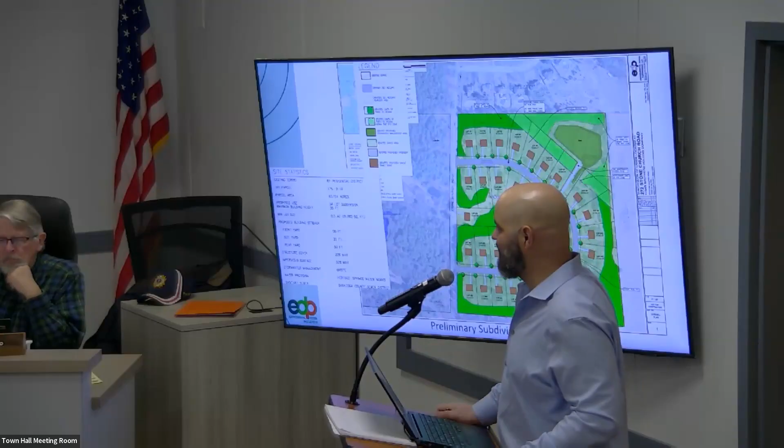That's moving along very well. We've been working with the county. Stephanie Ferradino is the applicant attorney who has been working with the county as well to get this finalized. I think we're just down to the easement figure now, being able to finalize it before the county board of supervisors can vote on and accept that dedication.

We will touch on this slightly. We are providing a screening and buffer along Stone Church Road, where we're going to leave as much vegetation as possible and then supplement that with a 30-foot wide buffer. This is the exact language and buffers that were provided on Greenfield Avenue associated with the Hunter Lane subdivision that is currently going in.

Another area we need to continue to work with the town on - I thought we had it figured out in the last subdivision, but it appears to be changing - is the mail kiosk, and how we're going to treat it. The mail kiosk itself has been pulled out of the right of way and is located on a private lot with an easement that will be owned and maintained by a homeowners association. That will be the only need for a homeowners association in this project. All of the improvements within the right of way are somewhat up in the air with the town DPW. Maintenance and operation certainly would not be their responsibility, it'd be the responsibility of the owner or the HOA. We would be fine eliminating the pull-off.

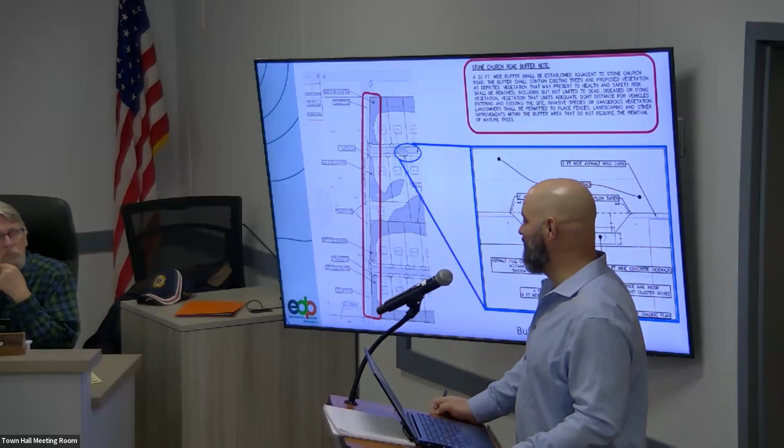I don't know that there's a need for it, but we do need to extend a sidewalk out to the road. We're open to whatever the town's going to approve. I just don't know what the DPW and the powers that be are going to come up with to make that happen. We will build this - we will build a sidewalk out to the road from the mail kiosk, keeping it on private property. That's, I think, one of the items we're going to have to condition any approval on: development of the mail kiosk to the satisfaction of the town.

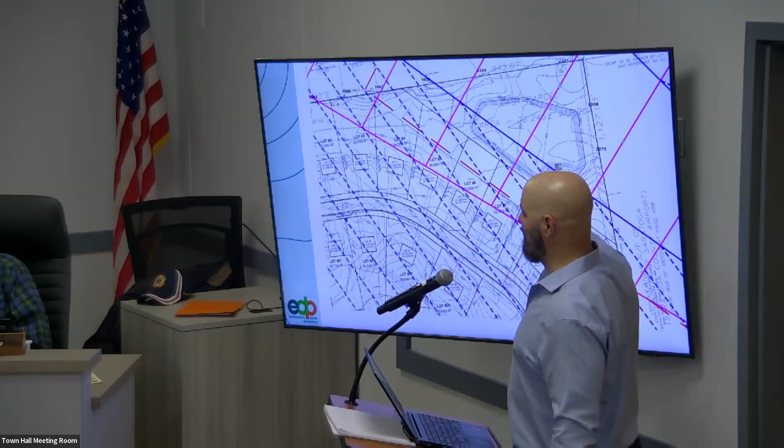All these lines represent all the different surfaces we've been working on. The red is the limit of the RPZ zone. The purple is the approach surface zone, a three-dimensional surface elevated above the house. Similarly, the blue is a vertical trapezoidal surface elevated above the house. In no instance does a house that meets the town's height requirements extend into any of the vertical surfaces or into the horizontal surface, which is the RPZ zone.

We also talked about the other item we were working on with the county: the proposed four-way stop to be located at Geyser Road and Stone Church Road. Today we received approval, or consent, from Chad Cook at DPW, identifying that the plan I'm showing here is what they will accept when it goes to construction.

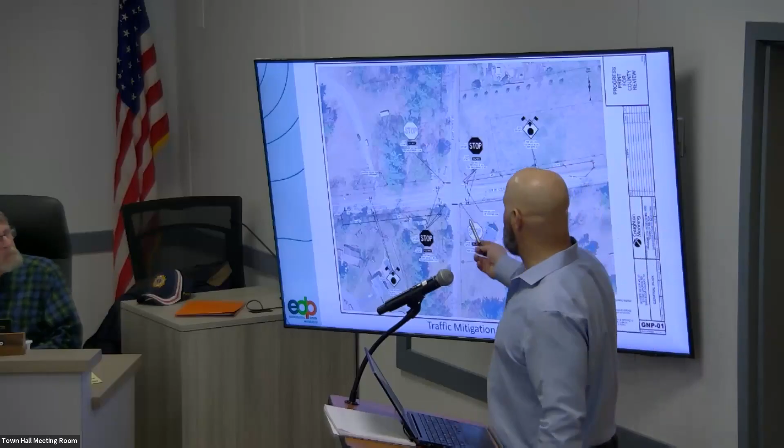To give everyone an idea of what they'll see at the intersection, there will be a four-way stop with a stop sign on both sides, so eight stop signs total at this intersection, using reflective diamond grade tape. For a period of about six months, there will be approach signs identifying 'stop ahead,' with orange flags on top, and all the stop signs will also have flags on top.

In addition, we're going to have a variable message sign on either side, going in about two to four weeks before installation of the stop signs and two to four weeks after installation of the four-way stop signs. Then they will be removed. But this is ultimately what has been approved by the county for construction there.

May I ask a question? I saw a document a month or two ago that said we didn't need one at the four-way stop. Am I just wrong, or did they change their mind?

There was a traffic engineer for our project who identified that we needed one. County DPW, through an independent study not solicited by the applicant—I believe it may have been solicited by the town, or the county did it a couple of years prior to this application, I can't remember if the town asked for it—found at that time it didn't warrant a four-way stop, but that was based on existing conditions. It didn't include this project, and it didn't account for what has occurred down at Milton Center.

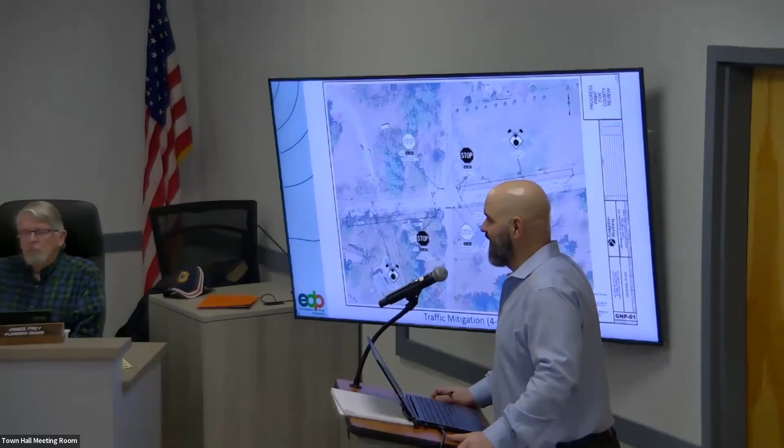Thank you. Ms. Maruso, do you want to highlight your report?

Sure. So just to reiterate and validate what Joe had said, the bigger outstanding issues with this project review largely pertain to county issues and the mail kiosk issue. As you've just gotten a comprehensive review, those are all being addressed or have been addressed. As Joe indicated, we've been privy to the discussions the applicant's been having with the county regarding working through the abrogation easements and associated mapping.

We've also been part of correspondence and received confirmation from Chad Cook this morning as to the consent to the latest updated plan for the offsite traffic mitigation. Again, as Joe said, we were kind of caught in this process, trying to figure out the best sequence based on the agencies that needed to render approval. So he's here tonight with a complete application that's received a positive comment letter from the county, fulfilling the conditions attached with the county referral.

We've also now received an update with regard to the formation of an HOA, which addresses, at least temporarily or in the interim until there's a larger policy in place, the mail kiosk maintenance issue that we've been dealing with. It's a planning challenge we see far beyond this particular project and would like to work on, but that's neither here nor there.

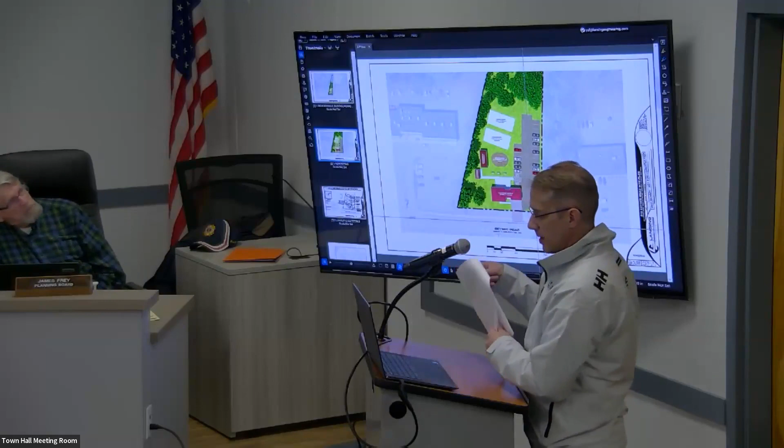The other reason, and this relates to another comment about screening, there was a request to provide plantings along the frontage, and the applicant's willing to do that. The thought was, if we leave the configuration where it is, it affords us the opportunity to wrap those plantings around a little more, as opposed to having a straight shot in where you can't plant on the pavement and people would be able to view in. This gives more opportunity to put plantings around that side and help screen that parking area. So that's that particular comment.

There was also a comment about the proposed hours versus other establishments in town. There was reference to the Milton Tavern being open from 11 a.m. to 11 p.m., and Dozers, just right across the street, being 11 a.m. to 12 a.m. So similar hours to what is being proposed. We feel it's appropriate for the area, especially considering, in our opinion, Geyser Road is mostly converted to commercial. We think it's a commercial corridor. This fits in with the fabric of the corridor, and as far as existing residents, the establishment in relation to all the other businesses in the area is quite close to Geyser Road, so we feel there's more than adequate buffer to any surrounding residential structures.

There was a comment about the lights. Our schedule says 7, the plan says 6. We apologize for that, that was a typo on our part. There are 6 lights that are proposed.

And as far as the height, the little tiny small print on the plan does say 10 feet. We'll make sure that's clarified on future submissions where we specify the 10 feet.

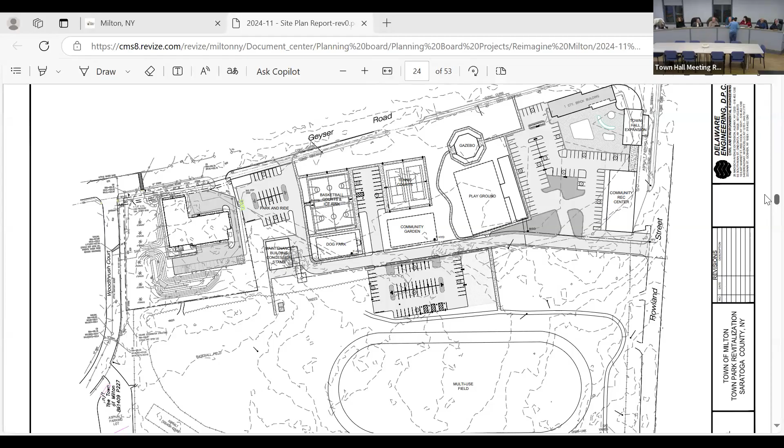We got a lot of comments from the public to have the playground be fenced so that parents can be sitting under the pavilion and enjoying themselves and watching the kids. So that was set up, that was a big comment, particularly from moms.

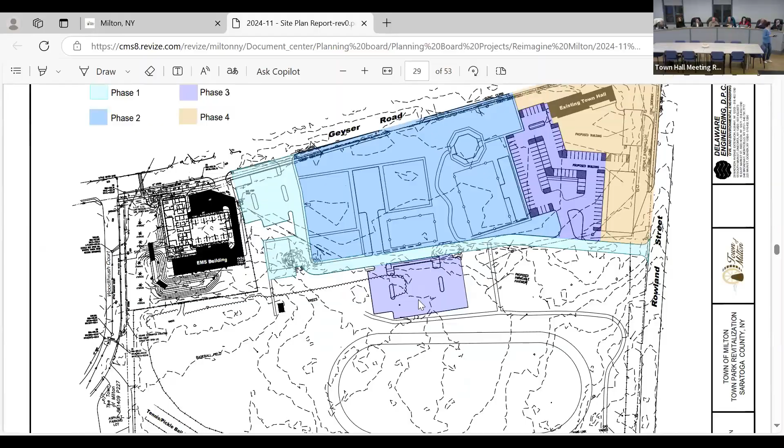Okay, there's some public service things like a compost pile, sand, salt bin and brush disposal that exist there now. Are those all going to be relocated? They're going up to the highway garage. Is that noted in here somewhere? It's not noted in the 80-page Reimagine Milton report, but if you look at the new plans, when we referred to the highway garage, the public sand and salt bin is there. The mulch pile and that other stuff, yeah, those were all accommodated up at the new highway garage.

Thank you, yeah, steel structure. Yes, so there's bunkers set up at the new highway garage for much easier access for the public to those. This one's not lost in the shuffle, no, everything that's here is being relocated up there. So this will be a completely open site. The only thing that's really going to stay is we have park maintenance down here now. We're going to continue to have park maintenance, it's just going to be a new building.

Just a thought, going off his concern about through traffic. I don't know if there's like temporary humps, they're rubberized, I think they're made of rubber. I'd like to refer to them as tables, speed tables. There's speed bumpers, tables, but they can be taken out for winter plowing. Speed tables you wouldn't even have to take out, you could leave them. Right, they're wider, longer. That might be a solution.

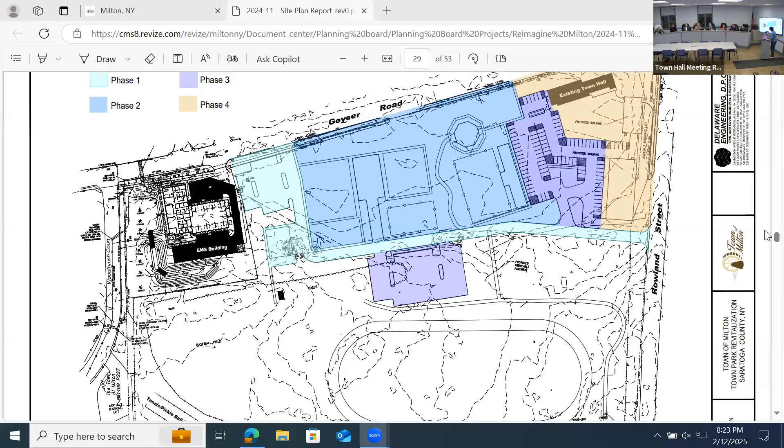This is permeable pavement. This is where the food trucks would park. Nope, that's parking - the purple is parking. And you see this label, it says proposed permeable pavement, correct? So this would be where the food trucks would park. I thought that, and the farmer's market and stuff, I wasn't sure where all that would be accommodated in here.

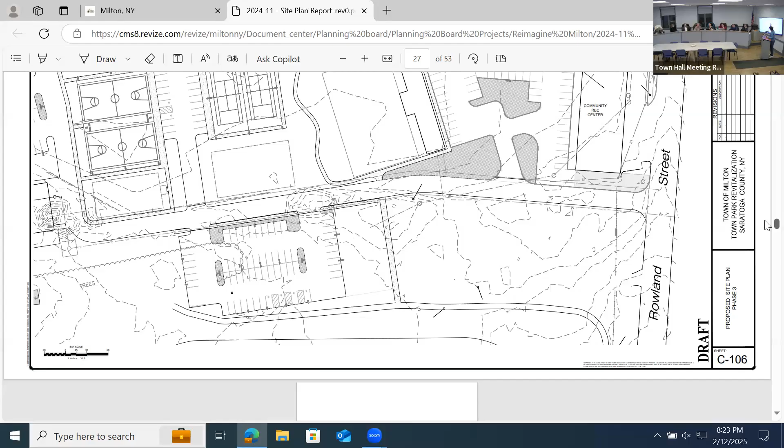So yeah, this area is the area for the food trucks. It's permeable pavement, so you'd have driveway access, and then this is kind of a great lawn where you would set up tents and do things. And then what was it - oh, the farmer's market. So there's a couple of different things you could do here. The pavilion is a good location for that as well, because it's simply got tables underneath it. It's this building, not that big though - the pavilion, right? And it's got power, it's got water, it's got sewer, all here.

It's basically just open, right? It's open on all sides. It's got picnic tables underneath it, it's a concrete pad. And this center part's where the facilities are. So this would be a good spot for a farmer's market. This band shell could be a good spot for it, or eventually way down the road, the community rec center for indoor use in winter time.

If you're thinking of that pavilion, I've seen this at some of these regional markets - those pavilions are high and allow box trucks to pull in underneath them. That's not what you're proposing here. Most, even the farmers markets here, have a vehicle and more than just a table.

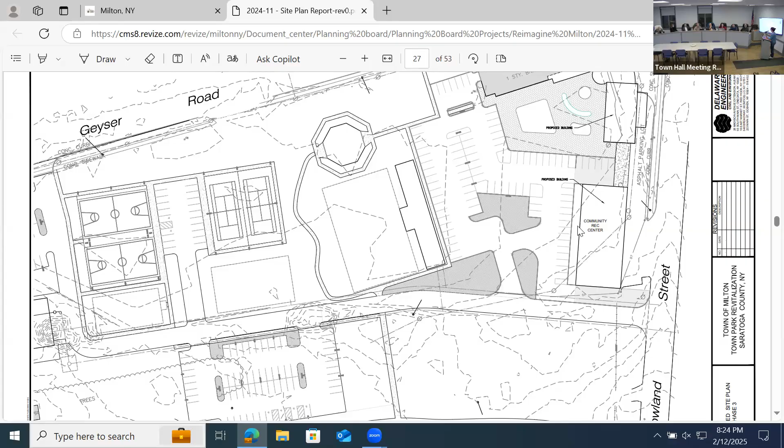I'm just trying to think - well, we can always set it up down in the parking lot. There's a lot of farmers markets where people just bring pop-ups, and they're not bringing a big vehicle setup. So I think it depends on the scale of your farmer's market.

If you're looking at something huge, then that wasn't something - I just don't know what the experience this summer was with the one we had, how successful or unsuccessful it was, and what type of facilities were used. I just didn't see it written in there. Yeah, that was the site's intended to be very flexible.

All right, if that's it, I'll just do those 2 or 3 comments and then push the recommendation to the board. I'll share it with you before I send it out.

When's the town board meeting? The 26th or something. Okay, so with that, I just need a motion to allow me to finalize a memo forwarding the recommendations to the town board. I'll make the motion. I'll second. All right, any further questions?

Being none, please poll the board. Mr. Marsicano, yes. Ms. Van Danza, yes. Mr. Whittle, yes. Mr. Fry, yes. Ms. Marin, yes. And Chairman Barto, yes. Okay.

Our last matter of business this evening is a review of the as-built drawings for the Fair Oaks Road dedication, which includes the Fair Oaks subdivision and the Homestead Landing subdivision, approved by the planning board back in 2015. The highway superintendent, the town designated engineer, and the stormwater authorities have approved all the infrastructure associated with this subdivision. As part of section 152 of the town code on public streets and highways, they're asking for the planning board to have their stamp of approval on those drawings.